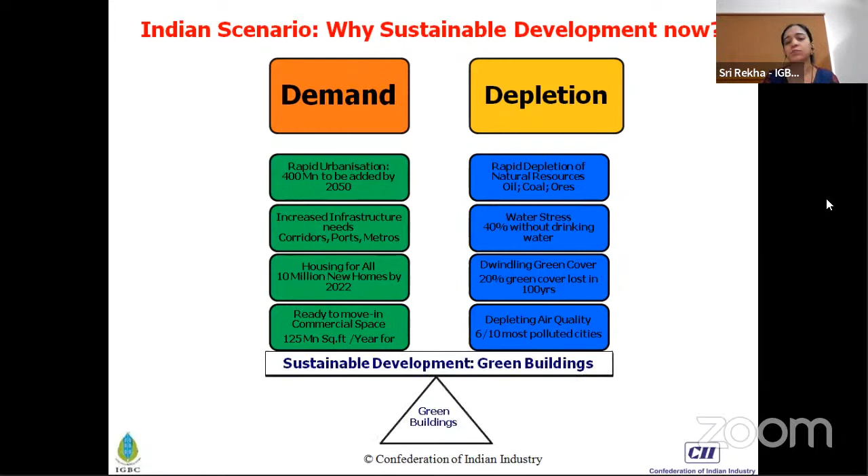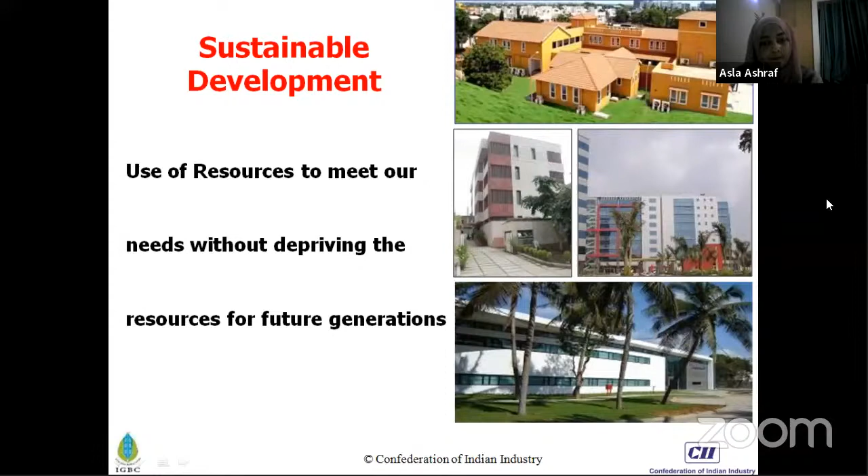In sustainable development, we talk about using the resources. We will not say no to the demand, demand will be there, development is required. You will use the resources, but at the same time use them conservatively and try to protect them, so that for our future generations we don't deprive them of these resources. That is the balance we are trying to get through sustainable development. That is the need, and we definitely need to take it forward.

So coming to why it is required, let me talk about the green building as a definition. Nowadays sustainability and green buildings are becoming part of the curriculum itself in academics, and you would have heard a lot of initiatives about green buildings. So when we define green building from our side, we define it as the one which conserves natural resources, uses less water, optimizes energy efficiency, generates less waste, and provides healthy space. So when we talk about all these challenges, conserving our natural resources and at the same time making our space more comfortable for our people, that is the main intention or goal when we are designing our buildings.

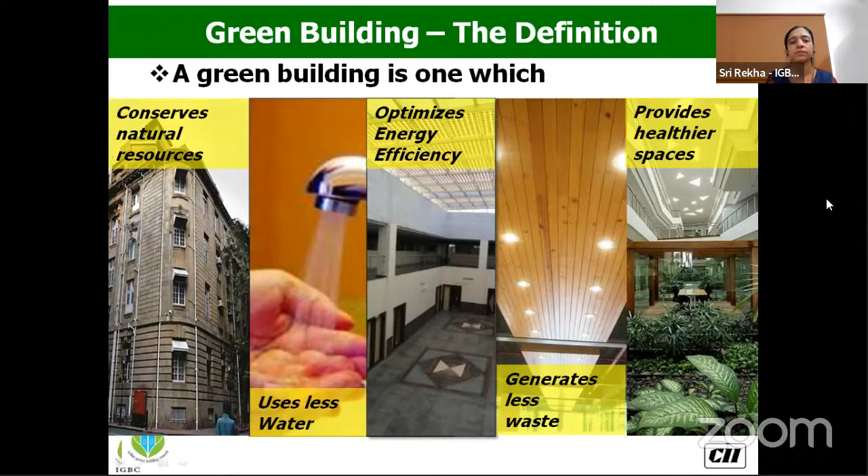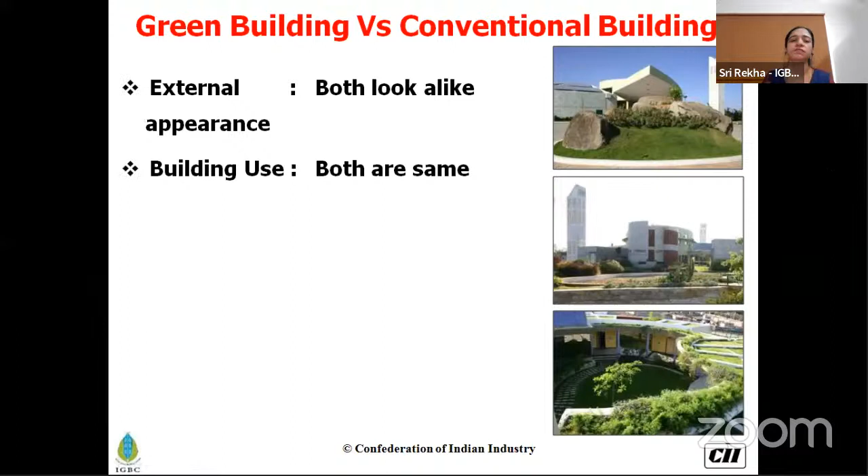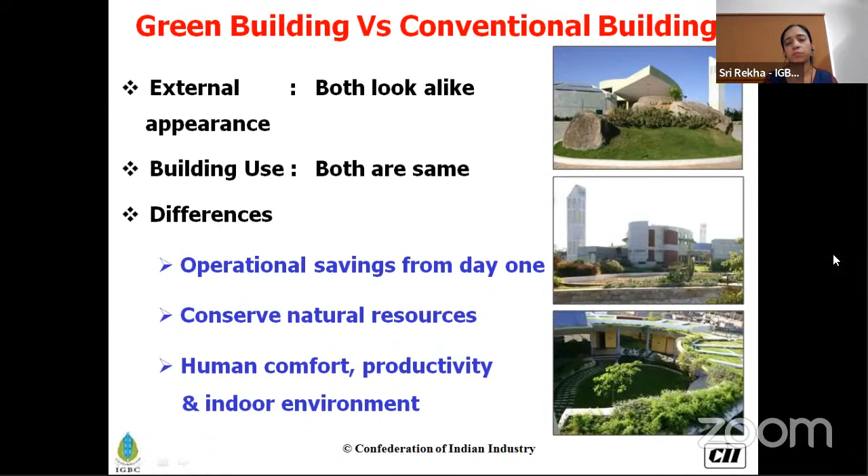So when you compare, what are the differences between a green building and a conventional building? Is it appearance wise? No, appearance wise they look the same. Or is it usage wise? Even the usage doesn't change whether it's a conventional building or a green building. The difference comes in operational savings from day one - that's mainly where we make the difference. Operational savings meaning energy savings, water savings, and so on. We also make the space more comfortable and the people more productive in our buildings. So that's about the definition.

So let me move on to how this movement is happening in the country. We are from IGBC, as introduced earlier. IGBC is the Indian Green Building Council, part of the Confederation of Indian Industry, which is more than 125 years old. CII works towards industry development, and as the construction industry was growing rapidly, we established IGBC in 2001 so that the construction industry developing in the country should go in a sustainable way. We established it in 2001 and have been taking it forward since.

Before we got into preaching it, we thought we should practice it. That's where our first building, the CII Green Business Center, came up. This is the first green building in the country, and it is a platinum rated building. We have implemented many green measures as part of it. So I take this opportunity to invite you all - whenever you're in Hyderabad, you can visit our center, and we would like to take you around the building and show you the measures we have implemented. That's how the green building movement started in the country.

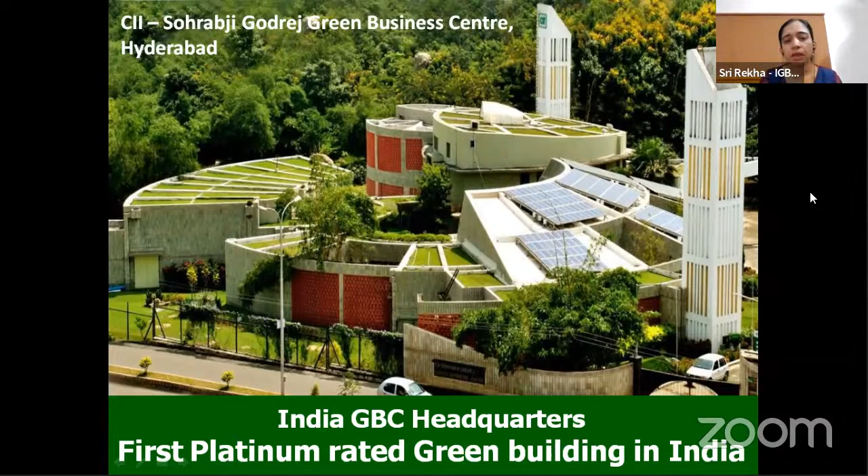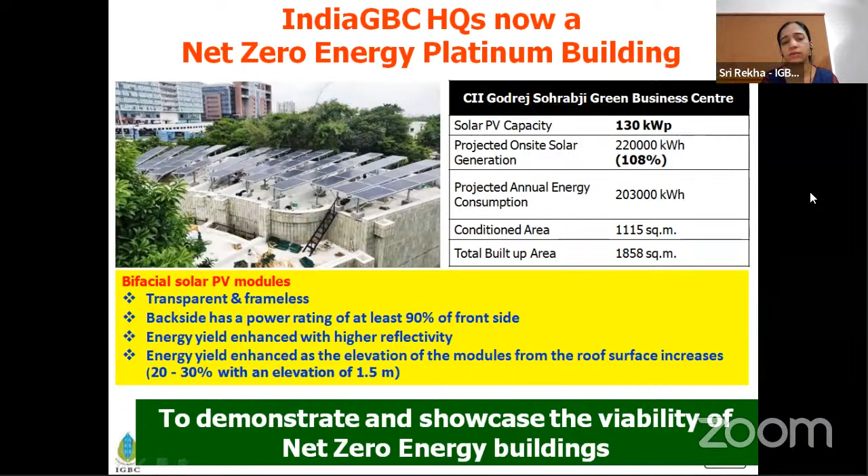We didn't stop at being platinum rated in 2003 - later we moved on to net zero as well. Just two years back, we also became a net zero energy platinum rated building. With the current global trend of reducing carbon emissions and moving towards net zero, IGBC achieved this by installing more bifacial solar panels, and with what we are using, we have become net zero energy platinum rated.

As I said, the first building was a 20,000 square foot building when we started. Now we have about 7,000 plus projects going green, and nearly 8 billion square feet of green building footprint, making India one of the top three countries in terms of green building footprint. Maybe if you compare this to the overall construction happening in the country, it's a small percentage, but as we move on, green buildings will become the norm and everybody will be implementing these measures.

So as the movement has increased, one rating system was not sufficient. Being in a council, we developed rating systems or guidelines people can refer to and implement. Initially there was only one rating system, but as the movement increased, there was demand from the market for each individual building sector, because we can't compare a residence to a commercial building, or a hospital to a school building. Everything has its own unique aspects.

So we have 30 rating systems addressing the various building typologies and categories, so that according to the building typology, people can refer to the guidelines, implement them, and get certified.

As part of the green building rating system, these are the major concepts we cover. Green buildings, if you relate to sustainability, it has to cover all the aspects - it should be a holistic approach. That's what we're trying to do in our guidelines and rating systems, starting from the design stage to construction stage to operation and maintenance. So the complete life cycle of the building has been considered.

When I say building, it's not just about how I'm going to consume energy or water - it's a complete holistic assessment, starting from site planning, how you consume water, how you reduce energy use, what materials you choose, and how you improve indoors. Covering this holistic approach, we have 5 major modules in the green building criteria: site selection and planning, water conservation, energy efficiency, building materials and resources, and indoor environmental quality.

Under each of these, of course, there are multiple concepts. I won't be able to cover all of them in today's short session - we have huge concepts under each module to be addressed.

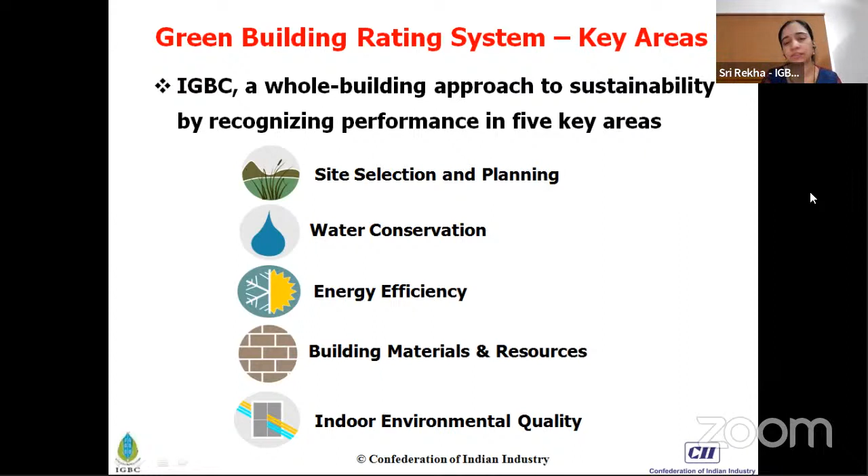We surveyed over 1900 certified projects which have already been implemented, and I'd like to show you the benefits and impact they have created.

These 1900 plus projects are able to save about 8 billion units of power per year. This 8 billion units is generally equal to the power requirement of 10 million urban homes - so much energy has been conserved by these buildings.

In terms of water, 26 billion liters have been saved, which is equal to a city like Hyderabad's 1 month water requirement. We talk about water crises, and just some 2000 projects are able to save so much. If every project implements this, you can see how much potential it has.

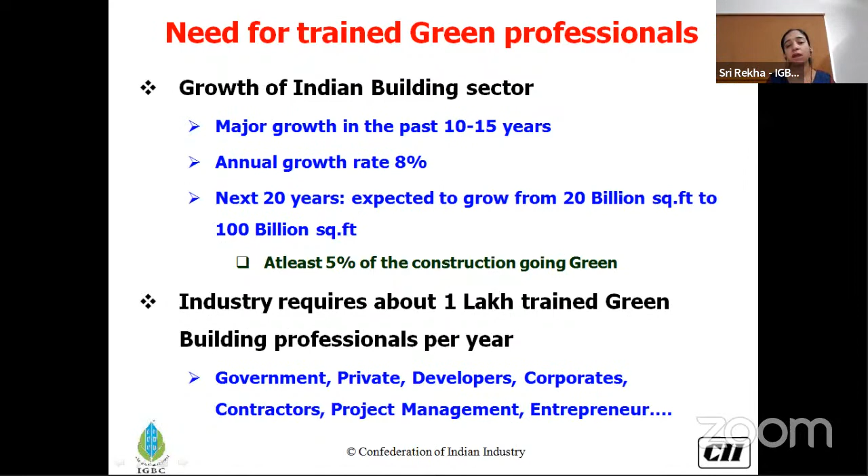According to surveys in the market, there is a requirement of 1 lakh trained green building professionals every year. When we talk about green building professionals, it's not just about architects who design it - it's about structural engineers, green building consultants, mechanical HVAC consultants, and even at the developer stage or government level, when they have policies on smart cities, they require professionals. Even in the manufacturing industry, they require a sustainability expert. So as you can see, there is a demand for 1 lakh trained professionals every year.

Given this requirement, IGBC has established a green education program with a vision to have the largest pool of trained professionals in the country, and also to create a linkage between industry and institutions.

Moving forward, for whoever takes part in the green education, the key benefits to students are: they get accreditation as IGBC AP Associate, exposure to green concepts in design, construction and maintenance, site visits, new trends and technologies, and since your client might ask about green building implementation and certification, you will have exposure to the rating system as well.

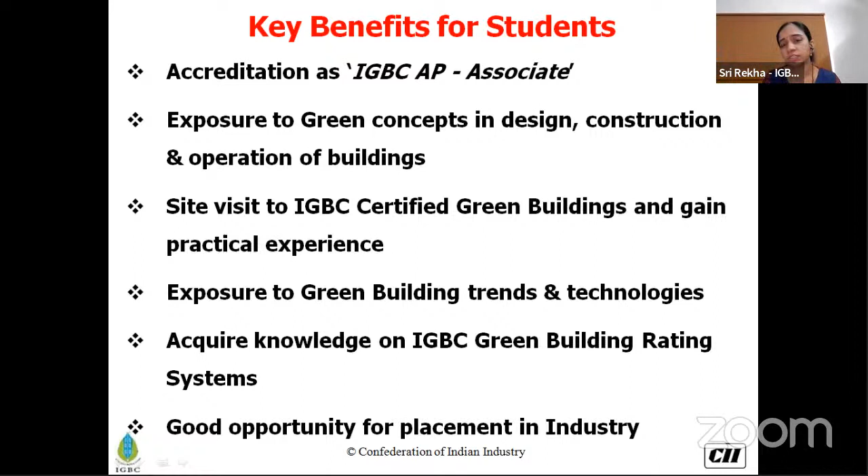With this accreditation as an additional qualification, it adds to your CV or profile that you are an AP Associate, giving you a good opportunity for placement in the industry as well.

In taking this green education forward, we have developed it as a semester course. Many colleges and institutions are taking it as part of their semester curriculum, as an elective course. We have developed a 45-hour program, and all the focus areas I've indicated are taken as part of this curriculum.

We have also developed a booklet - a textbook published by IGBC - so people can use it as a resource material as well.

Even institutions and faculty will have a benefit. We have an industry-academia linkage, and we are going to build the capacity of faculty, and faculty will also get accredited as IGBC Accredited Faculty.

So how are we taking the methodology? We are tying up with educational institutes. We are training the faculty, because we are just 30-40 engineers and architects and can't go to every college. So we train the faculty, and these faculty can train their students as a semester course. In between, whenever they want expert talks, webinars or site visits, IGBC will facilitate them. After taking the course, students take our online exam and get accredited as IGBC AP Associate.

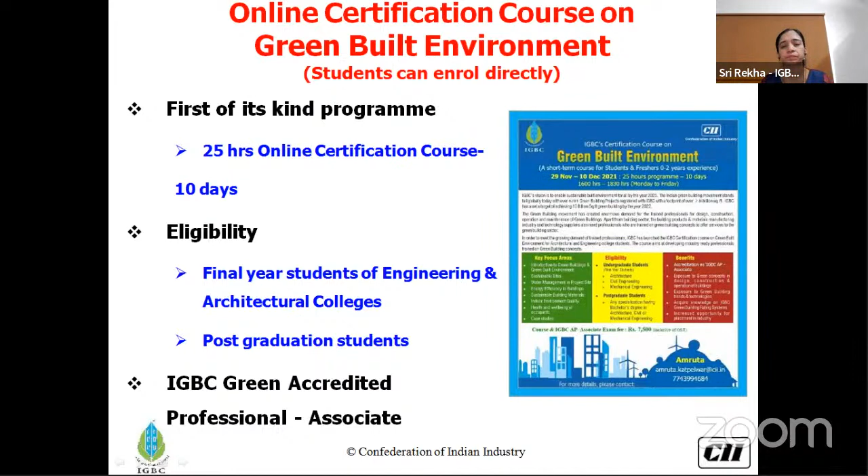AICTE, All India Council for Technical Education, and even the Council of Architecture have recognized us. We have signed an MOU with them, and we are doing regular faculty development programs along with AICTE. This is again an online program, and faculty are getting trained and accredited.

Next slide. So here I would like to hand over to Asla. So as I've given you the brief about how the movement has come up, and about the education and all, she would be continuing with the concepts on green buildings for a certain time. Over to you, Asla. Thank you, Rekha ma'am.

Thank you for giving an insight so precisely on green building and what can be the green building concepts. Good morning, students, good morning all of you. Before we move to the green building concept, I would like to revisit what Rekha ma'am has already explained - green building is already a holistic approach that leads to sustainable development. This concept has been taken from the 5 elements of nature.

One is Prithvi - that's how we select a site, site selection and planning. Second is taken from Jal, that is water, the water conservation. Since it's a holistic approach, it adds on to site selection and planning, water conservation, Agni - that is energy efficiency, Vayu from air - indoor air quality. It's very important to maintain good indoor environmental quality to call a building green. The 5th one is Akash, sky - that is daylight and night sky pollution.

So let's move on to a few green building concepts. I would also like to know from the students - what is your perspective on a green building? How is a conventional building different from a green building? Can anyone initiate on this? Anyone, if you want, write in the chat box.

So a green building also conserves natural resources, uses less water, optimizes energy efficiency, generates less waste, and provides healthier space. So how is it different from a conventional building? It also uses less lighting, and creates less waste and less water usage.

When we talk about water consumption, for a conventional building, 45 liters of water is required per person per day. For a green building, only 30 liters of water is required per person per day. There are different parameters added to a green building for water - faucets that use less water, with aerators provided in those faucets. This is how they create less waste and less water usage.

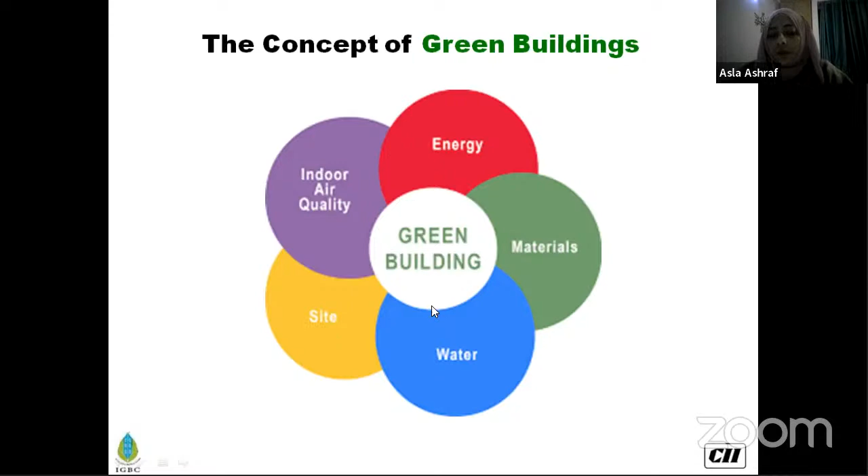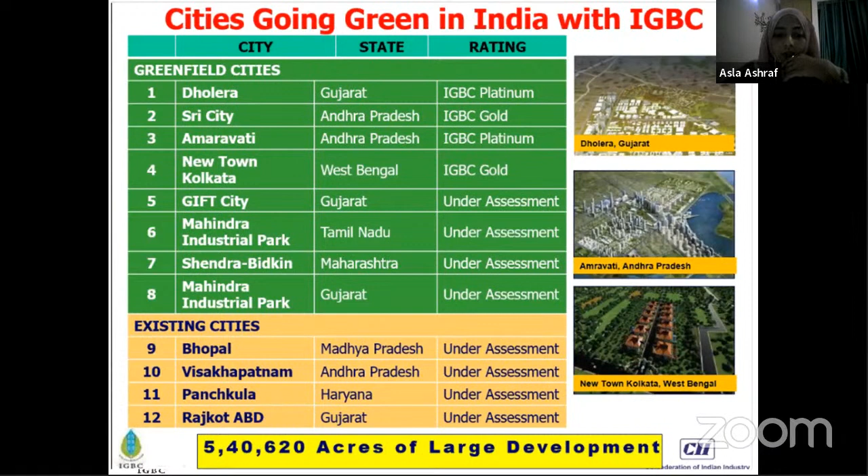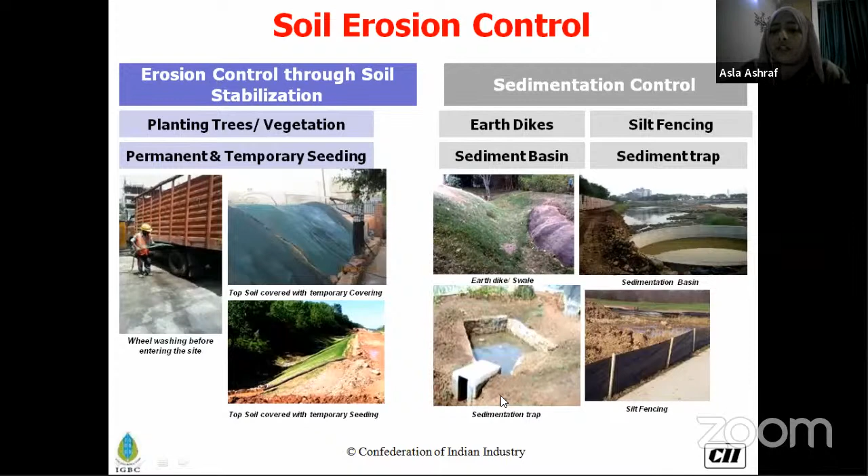Earth dikes are made to prevent water loss, for water conservation, and certain pools are made for collecting water. These are the sedimentation basins, and sedimentation traps are made on the construction site. These are certain soil erosion control techniques, one of the concepts.

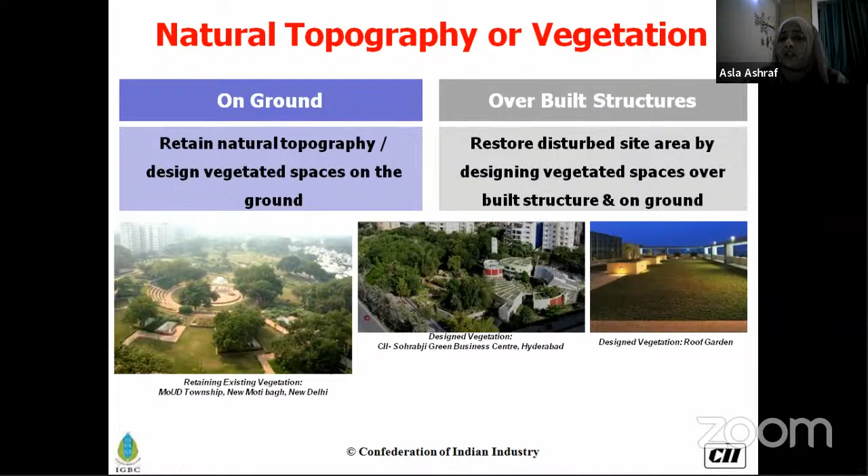This overall built structure is restored by restoring the disturbed site area, designing vegetated space over the built structure and on the ground. Let's move on to the next slide.

What we do is use high SRI index roof tiles or paints on the roof, so they reflect the heat, while these solar panels absorb the heat and convert it into energy. This SRI, option one, is high reflective paints used on the roof.

This is an example where high SRI, solar reflectance index, is used on the roof of Raheja Vistas. When we talk about SRI, solar reflectance index, this is a calculation to understand the roof's overall capacity to refuse solar heat.

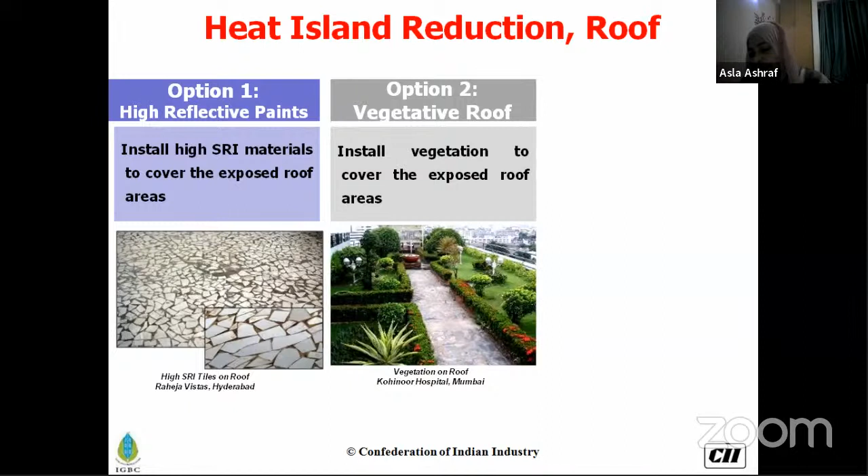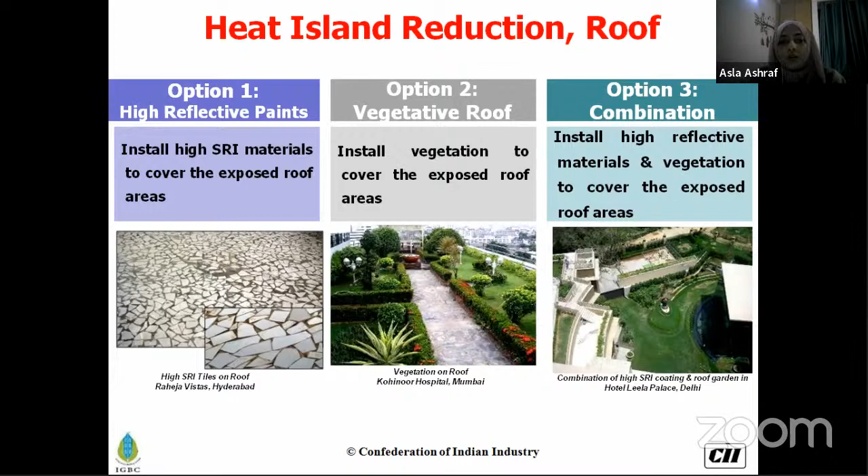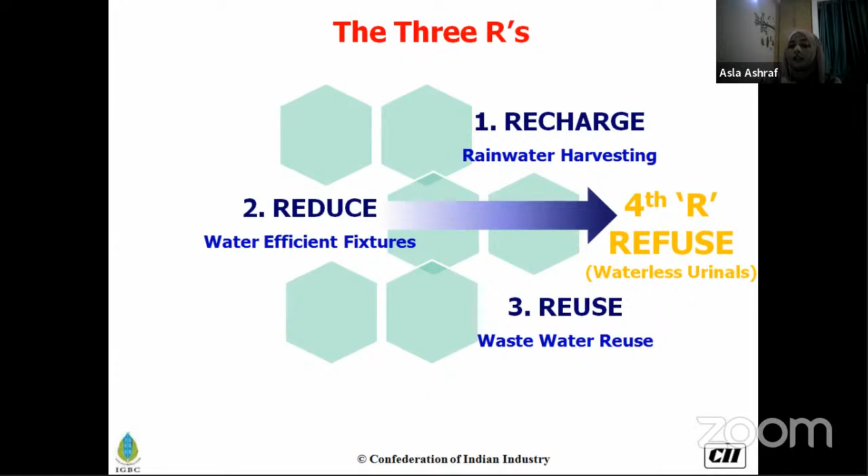And when we talk about reuse, wastewater reuse, there are certain techniques that use wastewater. So these are the four R's - this is the waterless urinal. When we talk about water efficient fixtures, that means refuse, like the waterless urinal. There are certain urinals that are designed this way. So rainwater harvesting - when we talk about rainwater harvesting, what do we mean by it?

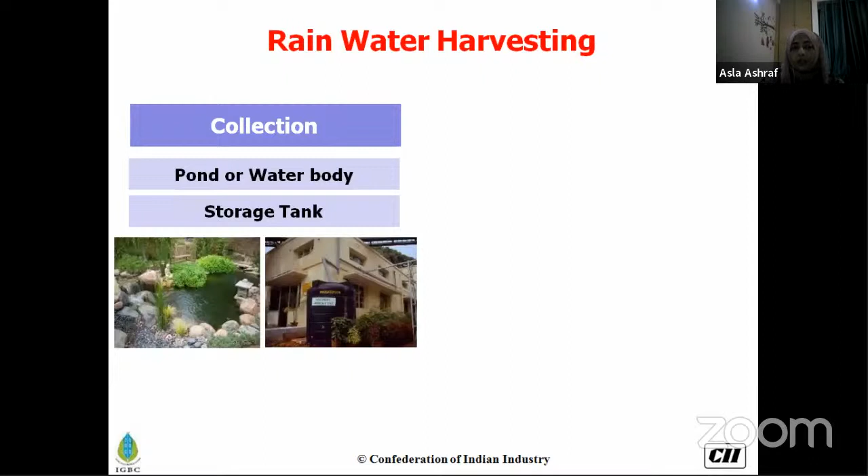By collecting water in a water body or pond, and storing this water in a storage tank. Recharge - there are percolation pits that are designed. There are bore wells that are designed to act as recharge pits.

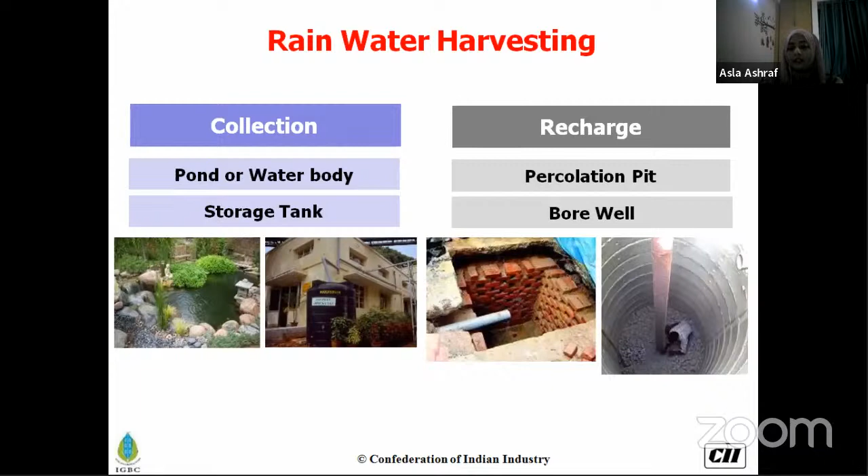When we talk about water efficiency, I'm coming back to that R where we are reducing the use of water that is used in our daily life. For example, in a conventional building, 45 liters of water is used per person per day, but in a green building, the same type of building, 30 liters of water is used per person per day.

How? We are using low flow fixtures. We are using the concept of aerators and sensor based fixtures. So what are these aerators? These are used on the surface, these are the screens on the faucets called aerators. These prevent pieces and particles from getting into the water.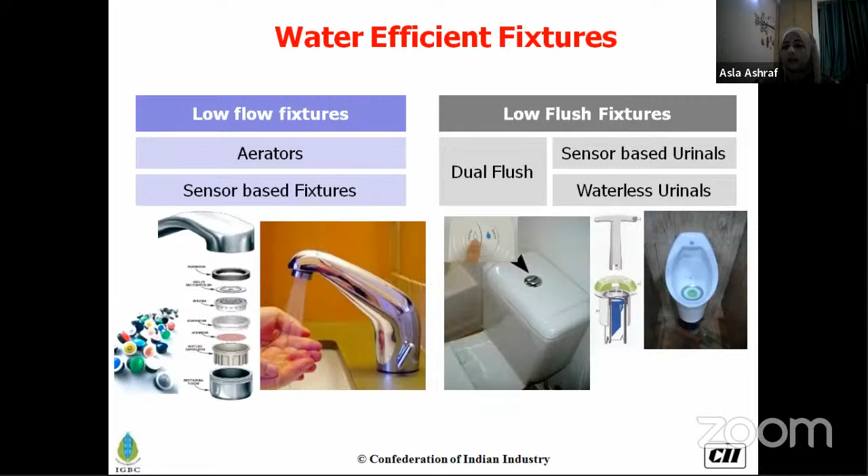So these are helping in providing less flow of water, and with less pressure. So these are the low flush fixtures, dual flush fixtures, sensor-based urinals, waterless urinals - certain types of urinals used in green buildings. These help reduce the flow of water and use less amount of water when using these urinals and flush tanks.

When we talk about energy management, we also talk about efficient envelope, good HVAC systems, passive architecture elements, or alternative energy systems. If I go into each one, it might take more time, so let's be precise. There are efficient envelopes, and we already know there are two types of techniques - passive techniques and active techniques - when designing a green building. There are efficient envelopes that use light in a certain way, good HVAC systems, passive architecture elements, and alternative energy systems - how renewable energy is used, how solar energy is converted into energy.

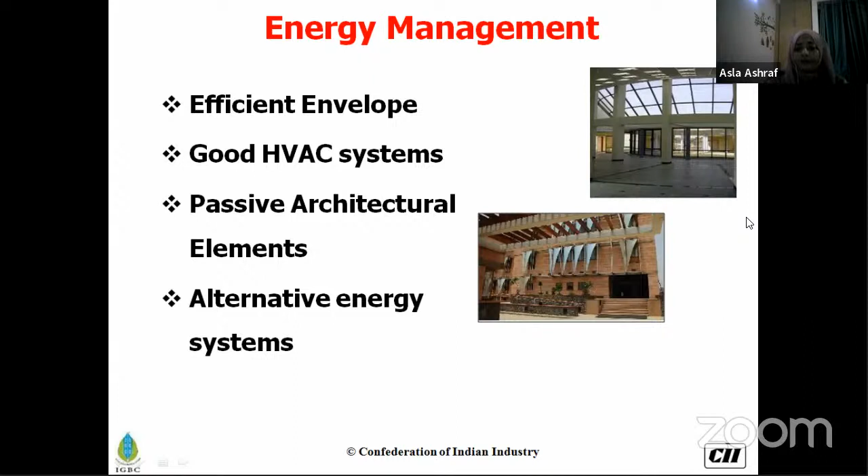There are sustainable materials - how we are reusing materials on site, how the building uses material, how we are restoring our environment through reuse of salvage material. For example, when restoring a site, we restore material that was already there, like certain doors, windows, and other elements that we as architects reuse on site.

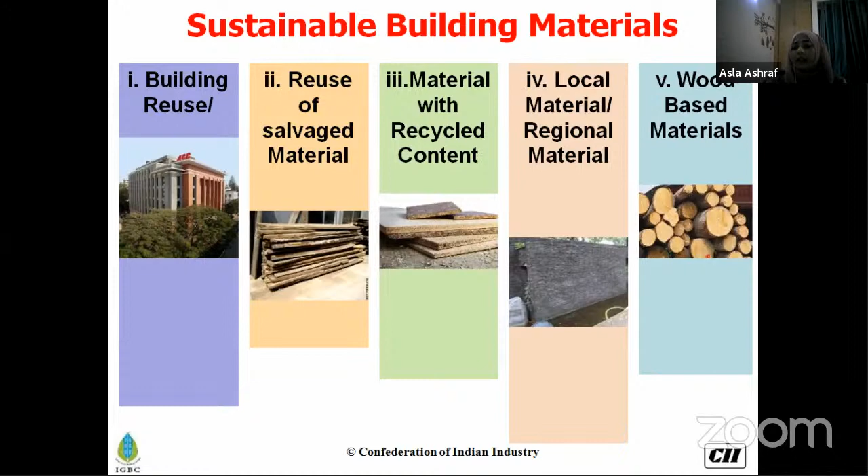And materials - they are materials with recycled content, local material and regional material. How as an architect we are approaching our local and regional material instead of going outside somewhere, and how we are using wood based material.

There's also automated solid waste management at building level. This is a different topic when we talk about green building - how we are segregating waste at the room level in hospitals. This waste segregation step requires a pneumatic tube front end system at each ward. The collected waste is sent to the authorized vendor, since it can release very harmful gases. This is one of the processes we follow in green building.

So when we talk about Green Pro certified, these are certain products and materials called Green Pro certified. There are around 26,000 plus products certified, and 150 plus companies registered under Green Pro certification, covering 26 sectors. These are called Green Pro certified materials used under green building.

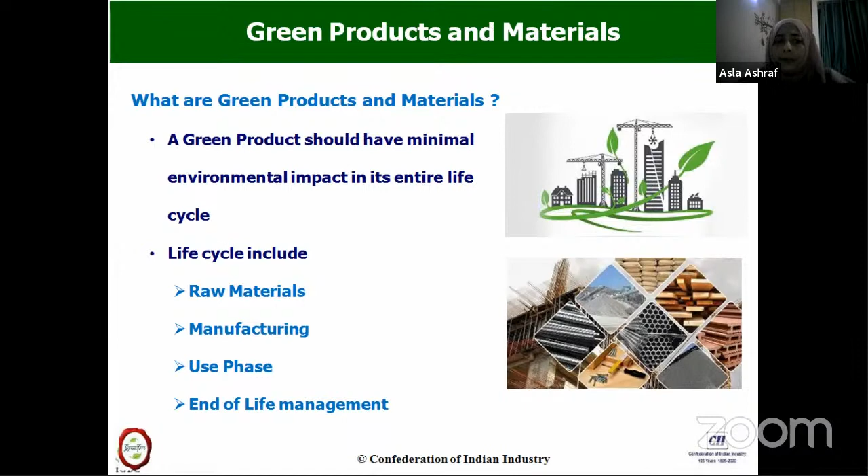Again, what are these green products and materials? Green products should have minimal environmental impact throughout their entire life cycle, including raw material extraction, manufacturing, the use phase, and end of life management. These are called green products and materials used in a green building.

When we talk about factors affecting indoor environmental quality - the air quality indoors, the type of paints we use, VOC paints, volatile organic compounds. The paint we normally use in a building, we don't even think about how harmful it can be. There are certain low VOC paints used when planning a green building, and we control indoor environmental quality with regular checks.

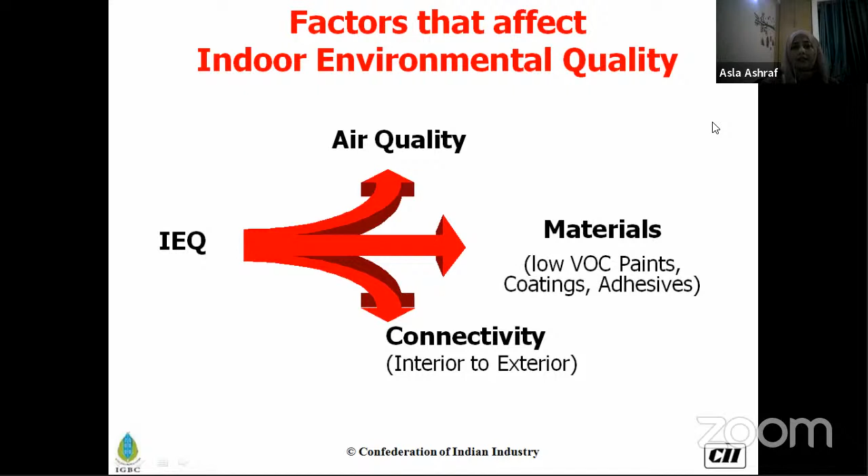There are certain CO2 sensors installed in a building. What they do is monitor and check the quality of the air and the quality of the environment inside the building. This is how the whole green building concept runs.

So to sum up, green buildings are an excellent opportunity to reduce operating costs from day one, and there are tremendous benefits for society and the nation. How we as a student, as an architect, can be a beneficial asset to society.

There are certain tangible benefits that are quantifiable and measurable - reducing operating costs, optimizing life cycle economic performance. Buildings called green buildings save energy compared to traditional buildings by 30 to 50%, and save water compared to conventional buildings by 20 to 30%. There's also a reduction in initial investment.

This is how this wider, dynamic technology and superior concept is used in green building. It also offers an enormous opportunity for students, and is a sense of pride and contribution to society. This is how the whole process runs, and how green building and IGBC help us be a beneficial asset to society.